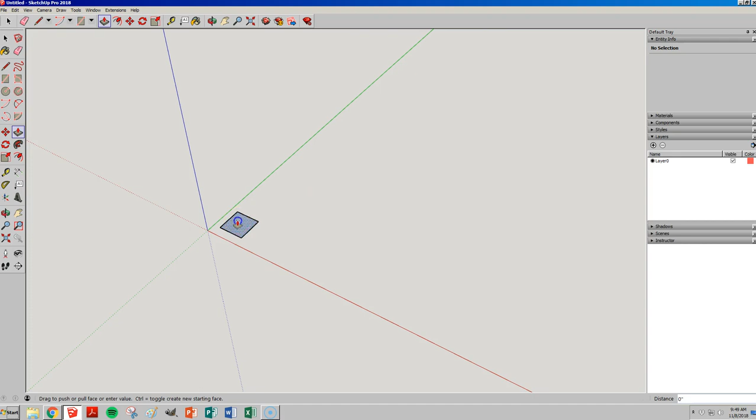So for 1.2.1, you already have that attached to this assignment. Basically, you have a 12 by 12 by 12 block. Let's just start there, and I'll go quickly and not talk too much. 12 by 12, push-pulling it up 12. There's our block. There are a lot of ways to draw this, and you don't have to follow the way I draw it if you don't want to.

I'm going to use the tape measure tool, then fill that back in with a line. Push pull that back 4, this was 4 inches, get rid of that template. Oops, I went too far on that push pull, should have only been 2. So when I pushed it, I pulled back 2 more. 8 by 8 rectangle up here, and this gets pushed down 4. Erase that line, and there is 1.2.1. Very, very easy for anyone to draw.

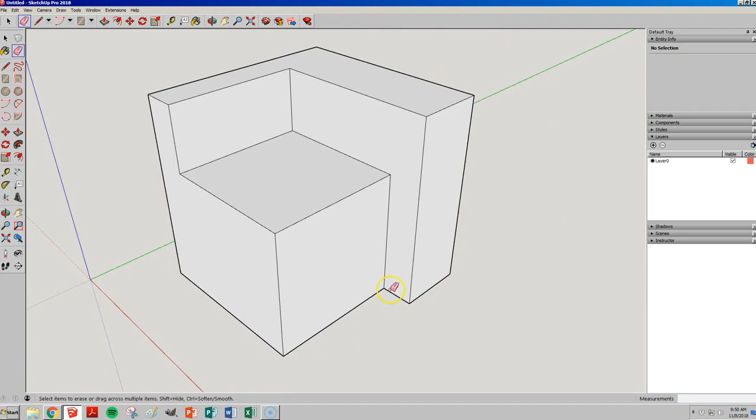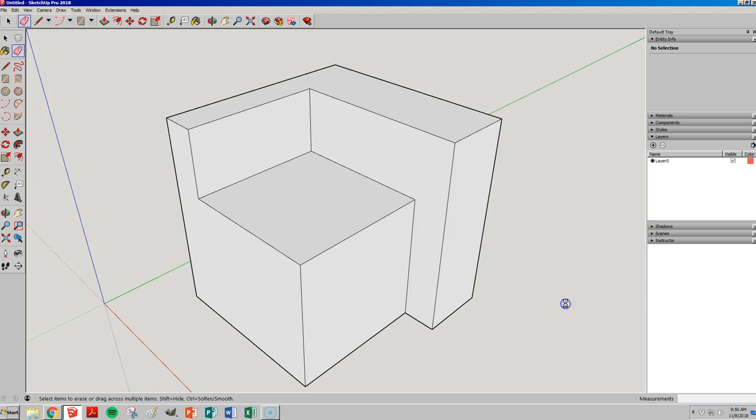Okay, File, Save As. Before I send anything to Layout, I have to name it so I can save it. I'm not sure those points will work. Let's see, I'm just going to put mine on my desktop. Alright, so it's saved, and now we're going to send it to Layout.

Layout is open for us now. Remember that we want to choose our paper size. A4 is not what we want, we want something letter size, and in our case we're going to look for a blank one. Based upon the drawing, you can choose landscape or portrait, we just have to make sure it says letter. I'm going to go with landscape. And there is our first document.

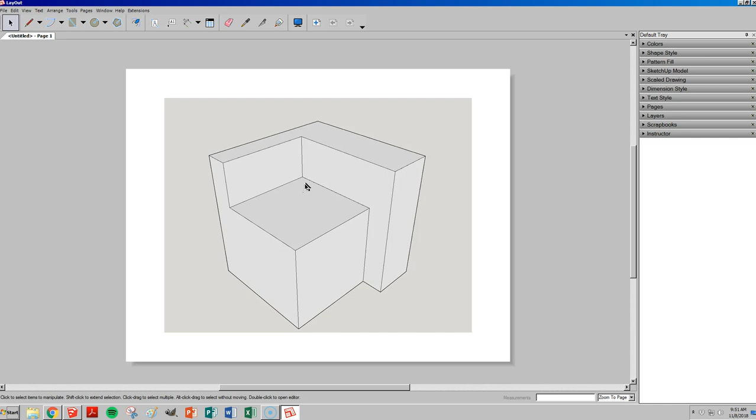A couple things I like to do when printing accurate prints: go up here and go to View, then Show Grid, you can see the little check mark show. That won't print off, it just helps us see where we're going. Then go to Arrange, and we want to make sure we're locking into our grid here. Let's see if that's working the way we want. Yeah, and turn on our object snap so things pull in together, you'll see why that's important in a minute.

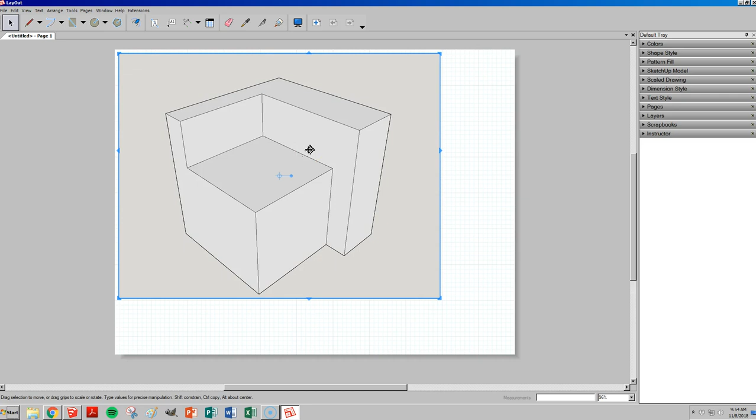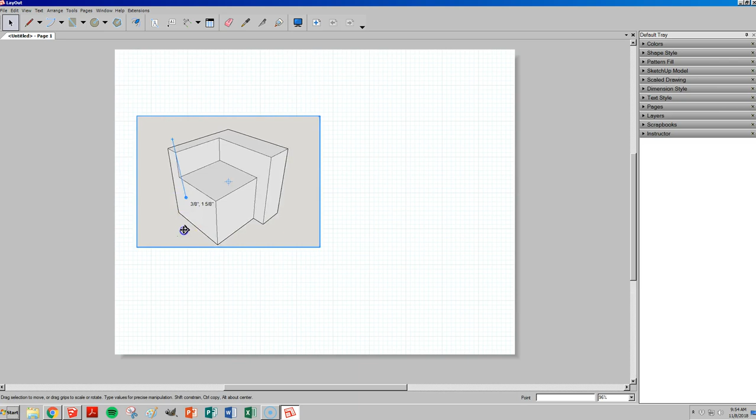Your assignment on Google Classroom says I need a top, front, right side, and isometric view. So we're going to have 4 views, and you can set this however you want. We're going to try to get each view to about 1/4 of the page. One view, this is going to be my top—actually let's start in the front. I'll move it down and start there, trying to make this window about 1/4 of the whole page. I right-click it and want to turn perspective off. It zooms way out, and that's okay for now, we'll fix that.

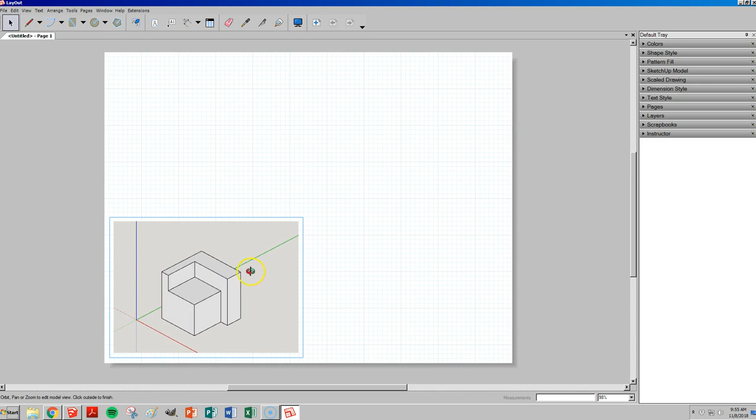So let's get our front view all set before making any other views. I zoom it in, then click off of it, right-click on it again, and I have this option. All these views pop up, and we want this one to be the front view. So there's the front view. I'm going to try to center that and make it a little bit bigger. Now we have a good look at our front view. I want to make sure it stayed in front view, and we're all set with one of the views.

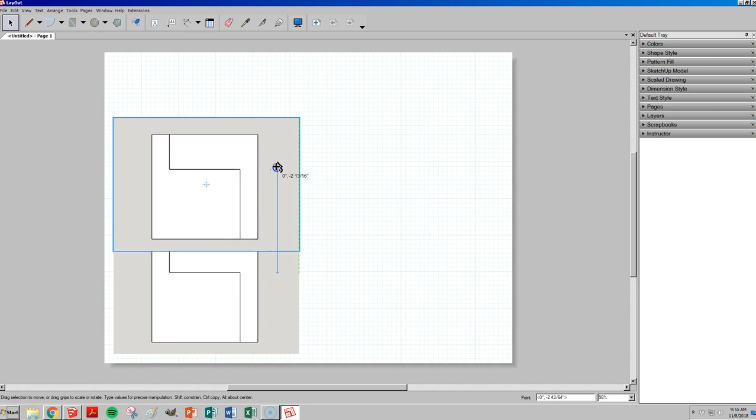Once you have one view all set, it's easier to make copies of it. I click on it once, push Control and that little plus sign pops up. Then, while holding Control, I drag it up, holding it right above there, and we'll get it right about there. So now they're perfectly lined up above each other. I right-click it and we want this one to be the top view. There's my top view. Going back to this front view, I do the same thing, holding Control and dragging it over.

And this view we want to be the right side view. So now I have my top, my front, and my right side. Those are pretty easy. If I want to move them around and get them centered, I can drag a window and select them all and try to center them on my paper some.

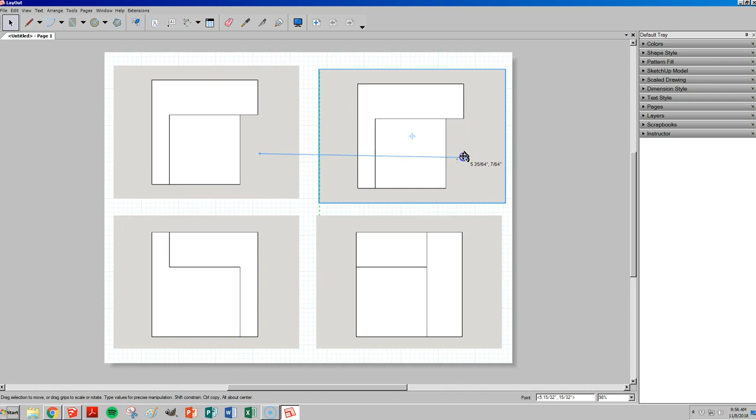There we go. And I'm only missing one view now, in the upper right hand corner. You can make a copy of any view you want. I'm just going to use this one for now, and make a copy of this window. I'm going to drag it over there and try to get it right above this one. Then we'll zoom in. I can see I'm not quite perfect here.

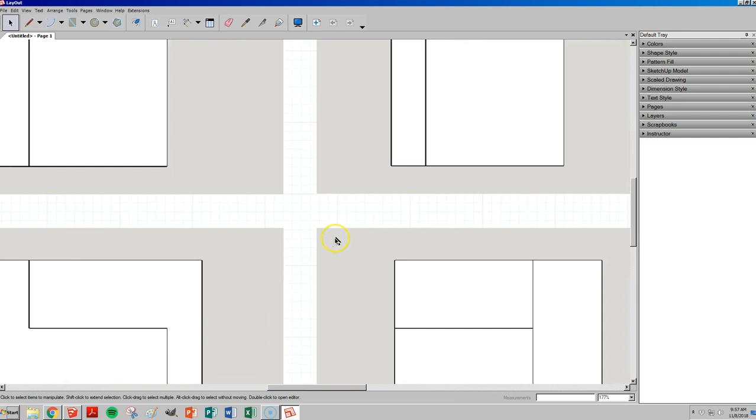Okay, so now I've got that one lined up. I'm really close to perfect. Maybe not 100%, but that's good enough for what we're trying to do there, where I don't think you'll be able to tell with the naked eye kind of thing.

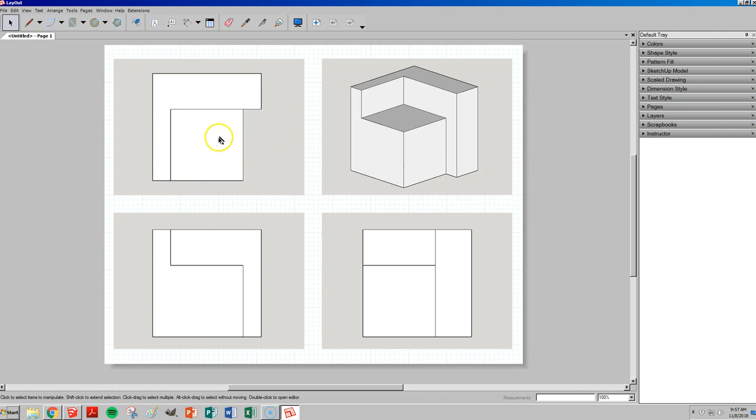In this upper right view, we need to be isometric. So I right click, and go down here again, and there's actually an ISO option as well. Zoomed in a little too much, so I double click, zoom out just a tad, and now I have top, front, right side, isometric. Let's get rid of our grid, hide grid.

Okay, so the next few things we have to do are dimension. We have to dimension our drawings. Once I click on my dimensioning tool, I'm going to want to go over here, and you can choose all your different styles there. It goes above the line, center of the line, below the line. There's a ton of different things. I'm just going to stick with what I have now.

All my measurements should be pretty easy. Also attached to your Google Classroom assignment was a PDF called Rules of Dimensioning. I want you to try to go through that. It's only 4 or 5 slides, I believe, and they talk about how to dimension something. I'll try my best here. Basically what we want to get used to doing is...

Your biggest dimensions should be the furthest away. Okay? So right now that says 1 foot. I already don't like that, so we're going to get rid of that. Let's go decimal style and see what that looks like. Too many decimals, let's change our precision. Again, in a simple drawing like this, we don't need much. That looks way cleaner - 12 inches.

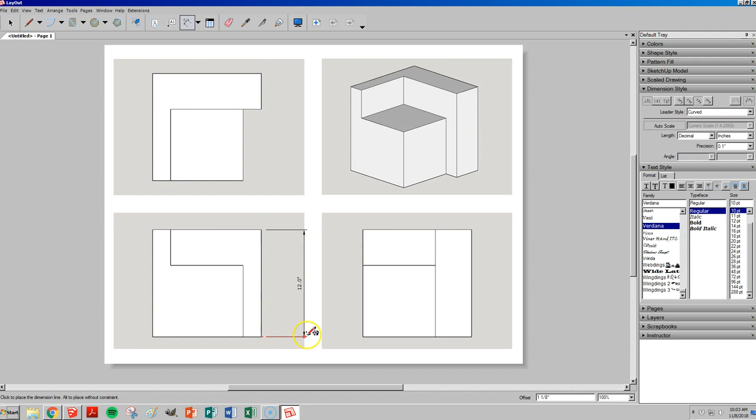So because this block's also 12, I want to put the big number 12 in between them because they share that dimension. Okay? And then this right here would have to go over top of this. We don't want that, you can see right there where it's crossing over it.

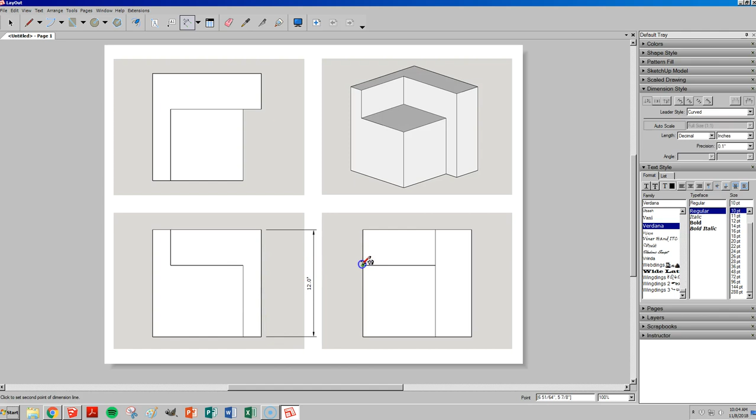This view is a much easier view to give that measurement. Okay? Same thing here - instead of giving this one in the front view, it's easier to give that in the top view and slide it down. And then you see that's kind of where we need it. We can then add this one as well and line them up.

And I'm just going to keep adding my dimensions. We do not need to have all dimensions present in the drawing. Well, I shouldn't say that - you need all of them present, but once they're given once, you don't need to repeat them. So I have 4 right here, I don't need to have 4 over here. I have 8 right here, I don't need to have 8 right there because they're given in other locations, if that makes sense to you.

Here's our bell for lunch.

Maybe I'll add this one right here. And again, the idea is to keep it nice and clean and not too many dimensions, but we need enough so that we can figure out what we're doing here. So while I have this one at 8, that means I don't need to give this dimension. I don't need to say that this is 4, because I know the total is 12. If I know this is 8, I can just do the math and know that it's 4 here. So that's probably all the dimensions that we need.

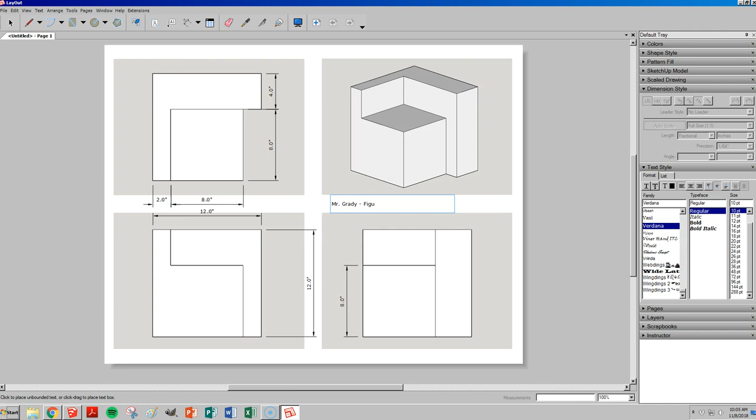So there's our dimensions. Let's add our name somewhere. We're going to put ours right there - Mr. Grady. Figure 1.2.1. If you want to add the date, feel free. You guys can do whatever you want for naming it. 77 is definitely not right - 17, there we go. Okay.

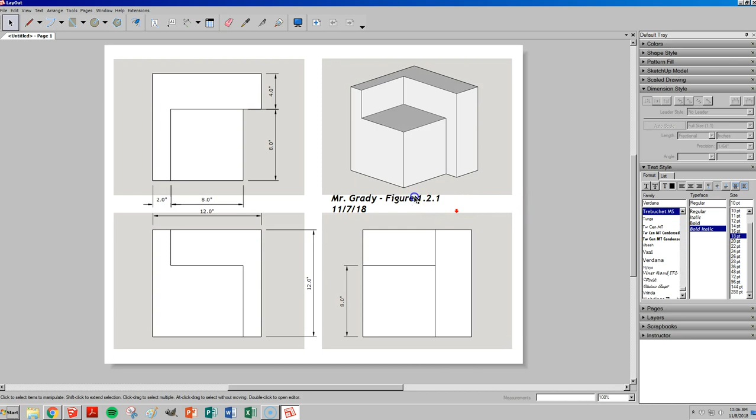And let's have some fun playing around with the font. Pick whatever you think looks good. If you want to move that somewhere, you can move it wherever you'd like, justify it off to the right. However you want to do it, it's just fine by me. Whatever you guys think looks good.

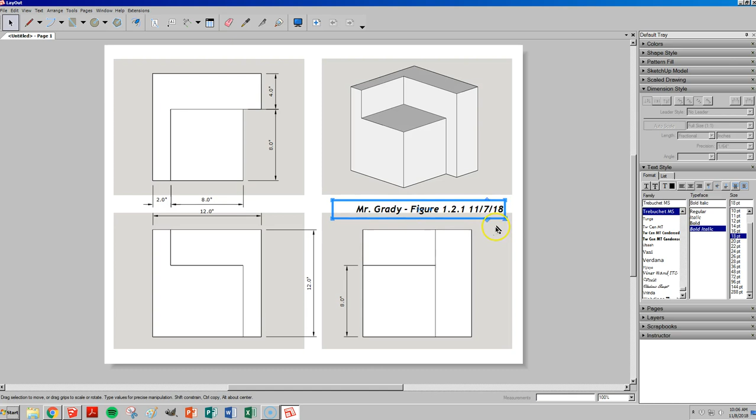I'm going to try to get it all in one line, kind of - that's my goal right now. There we go, so it fits in there nice. So there's my drawing. I'm now ready to turn it in.

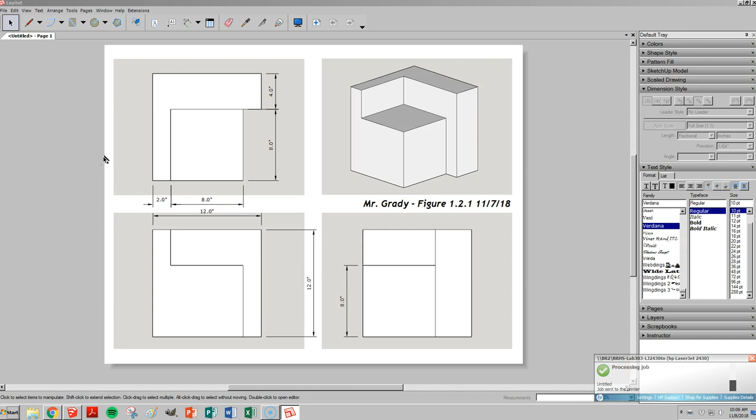So I hit Control P. I want to choose BRHS Lab 303. Print one copy. Print. And now you are done with this drawing. Remember, you're going to do 1.2.2, 1.2.3, and so on for that whole packet. You're going to staple all these together, turn them in just like we did before. And this is how we're going to do the next few SketchUp drawings where we're drawing parts.